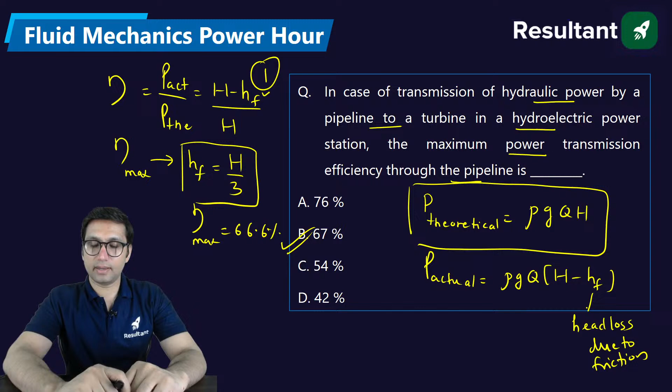Next question. A pipe having a length of 200 meter and 200 mm diameter with friction factor of 0.015 is to be replaced by a 400 mm diameter pipe of friction factor 0.012, to convey the same quantity of flow. The equivalent length of the new pipe for the same head loss will be?

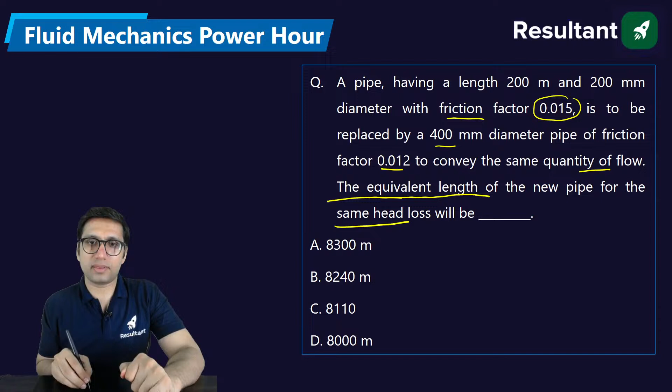In this question two things are given: the head loss is the same, and the discharge is also the same. So for two pipes, the head loss is equal to FLV square by 2GD.

If you have to write the head loss in terms of discharge, it will be FLQ square over 12D power 5 — this is the formula in terms of discharge. If you write it in terms of velocity, it will be FLV square by 2GD. But why am I using the discharge formula and not the velocity one? Because discharge is mentioned in this question, that's why I use this formula.

If I equate the head loss due to friction in both cases, this will be F1 L1 Q1 square over 12 D1 power 5 equal to F2 L2 Q2 square over 12 D2 power 5. Since it is mentioned that the discharge is same, Q will get cancelled out. Same quantity of flow is given. The 12 will also get cancelled out.

Rest all the values are given in this question. Just put those values and you will get the answer. It is 12.1, but you can take approximately 12.

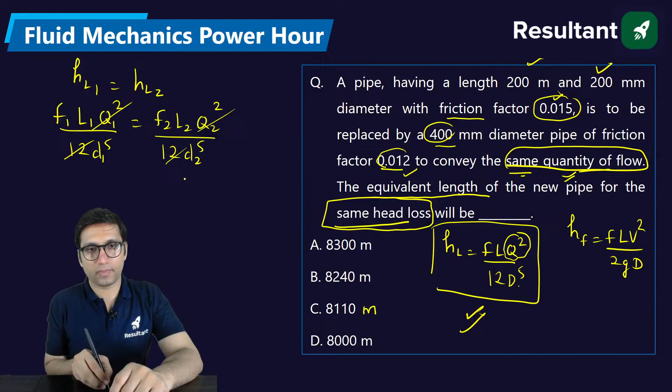For better result, L2 will be equal to F1 by F2 into L1 into D2 by D1 power 5. So this will be 0.015 over 0.012 into L1 equal to 200, into D2 by D1, where D1 is 200 and D2 is 400, by 200 power 5.

Please try to solve this question. So this will be 0.015 divided by 0.012 into 200 into 32. Yes, use calculators, try to solve this question correctly.

If you use a calculator, you will get the exact answer, and that will be 8,000 meter. Are you all getting this value? Please let me know. I don't want an approximate answer, you should get the exact answer. If you use the calculator, you will get the exact answer of 8,000 meter. I hope you all are getting this value.

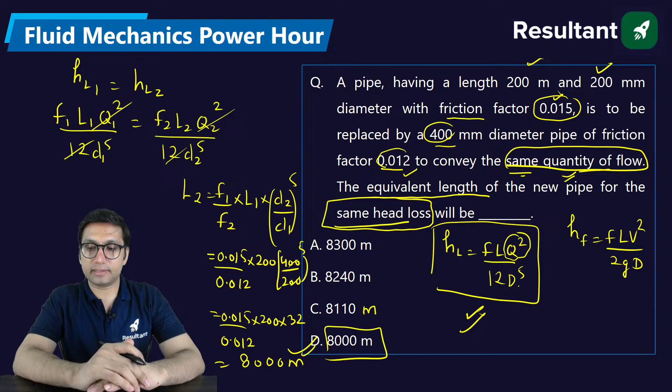Okay, understood the question. Next question. A curve that is everywhere tangent to the instantaneous local velocity vector is called as? There are different types of lines or curves mentioned: streak lines, path line, normal line, streamline.

Now we are talking about a curve that is everywhere tangent to the instantaneous local velocity vector. You must have read about streamlines. Streamlines are imaginary curves, and if you draw a tangent on these streamlines, this tangent gives you the direction of the velocity vector. So these imaginary lines, over which if you draw a tangent you get the direction of instantaneous local velocity vector, are called streamlines.

Okay, very good. Next question: for fully developed laminar pipe flow, the average velocity is? For fully developed flow, when we say pipe flow, we are talking about flow through a pipe, and also about the fully developed flow. So when we say fully developed flow, initially when the flow takes place inside a pipe, the velocity profile tends to vary like this.

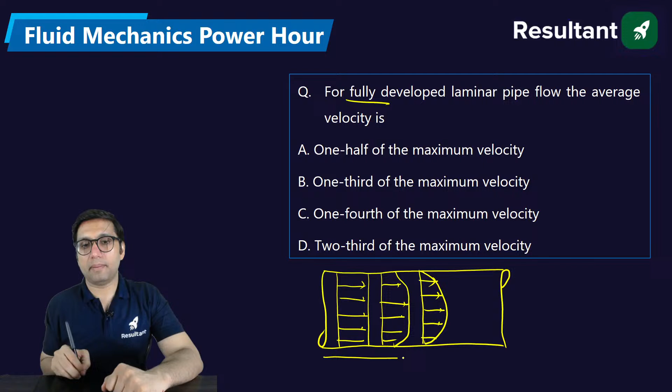But after some time, the variation becomes uniform. That means there is no variation of the velocity profile. The point after which the velocity variation stops is called the hydrodynamic length. After that, the flow is called fully developed flow, and the velocity profile will stop changing its nature. Velocity profile will become constant.

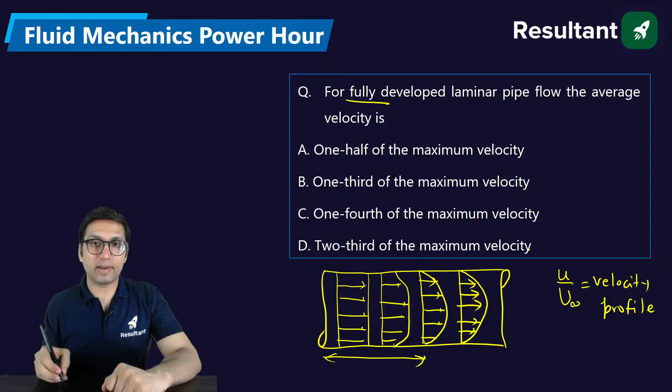What is velocity profile? That is u by u infinity. This is called the velocity profile. The velocity profile will not vary in the direction of the flow. Will not vary with direction of flow. That is called fully developed laminar flow.

Now, in case of laminar flow through the pipe, the average velocity is equal to half of maximum velocity. The average velocity becomes half of maximum velocity, but this is only true for pipe flow. So when we are talking about the pipe flow, then this is correct.

But if we talk about the flow through parallel plates, fixed parallel plates, here also the same condition happens. The maximum velocity is found at the center. At the center you will find the maximum velocity, but the average velocity will be equal to 2/3 of maximum velocity for the flow through fixed parallel plates.

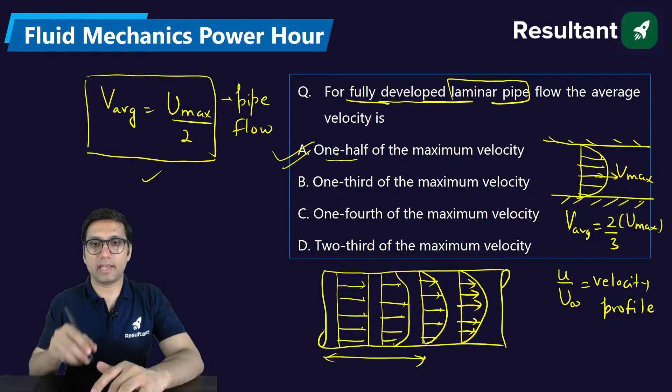Clear? In this case, the answer will be option A, 1/2 of the maximum velocity.

Consider the following statement about the losses in the pipe flow. Shock losses are the major losses in the pipe. Shock losses are major losses.

Viscosity is a property of the fluid which accounts for major losses in the pipe.

No, it is not 3 by 2. It is 2 by third if you are talking about the average velocity. Generally, we talk about the average velocity in terms of maximum velocity. So it is 2 by third of maximum velocity, average velocity.

The head loss at the entrance of the pipe is half that of its exit. There are three statements mentioned here. Which of the following statements are correct about the losses in the pipe flow?

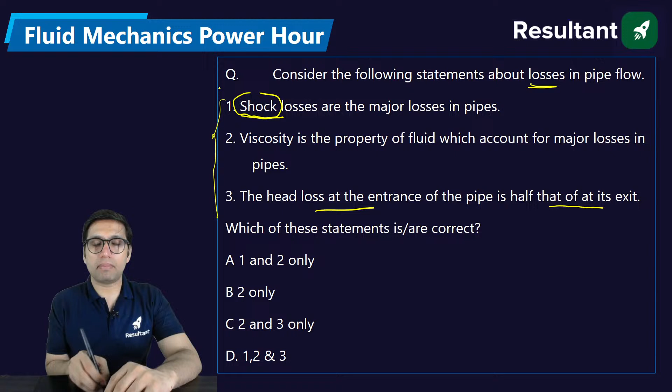So if you see the first statement, shock losses - what do you mean by shock losses? If you remember, when we discuss minor losses, there are different types. Sudden expansion loss takes place when the flow suddenly expands, passing from a small pipe to a large pipe. Similarly, sudden contraction. So when these phenomena happen - sudden expansion, sudden contraction, bend loss, entry loss, or exit loss - they all come under minor losses.

They are all shock losses. So they are minor losses, not major losses.

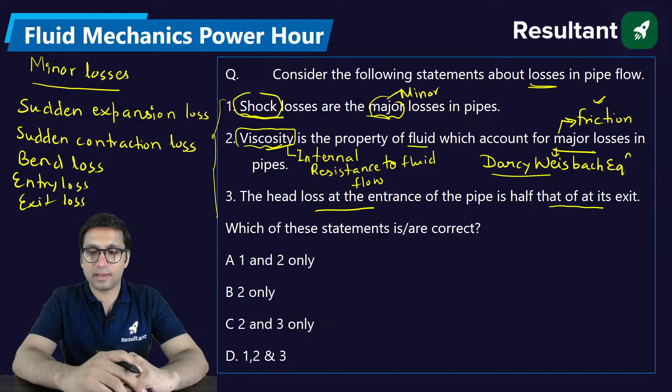The head loss at the entrance of the pipe is half that of exit. The exit loss you must have studied - the exit loss is equal to V square by 2G. Entrance loss is equal to what? The loss at the entrance of the pipe is equal to half of the exit loss. It is just half of the exit loss, which is 0.5 V square by 2G.

So the right answer for this question is option C, 2 and 3. Clear?

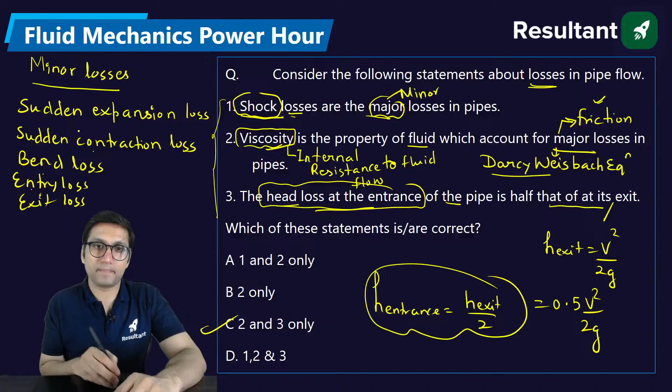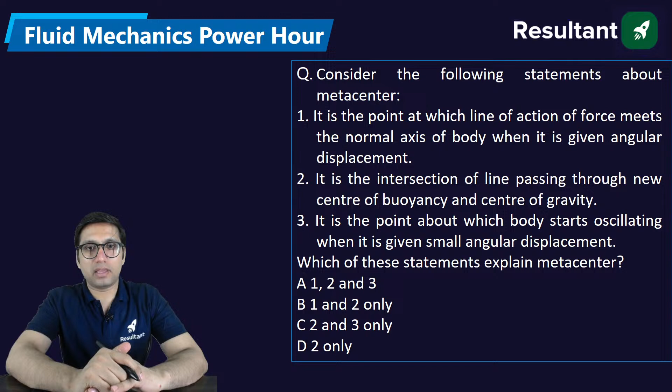Meta center you all have studied. It is a point, denoted by M, and this point is basically responsible for the stability of a floating body. When we have to study the stability of a floating or partially submerged body, this point meta center plays a very important role.

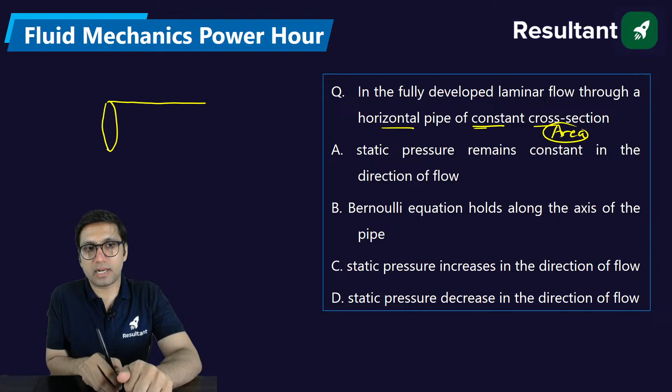Now a fully developed laminar flow is happening inside this pipe. Then what can we say about the static pressure? Static pressure remains constant in the direction of flow. Let us say this is the direction of the flow.

Now tell me which question this is. And we are talking about fully developed flow through a horizontal pipe. First statement: static pressure remains constant.

Does pressure remain constant? You have studied in this case that pressure will decrease in the direction of flow. You must have studied about that. This is called negative pressure gradient.

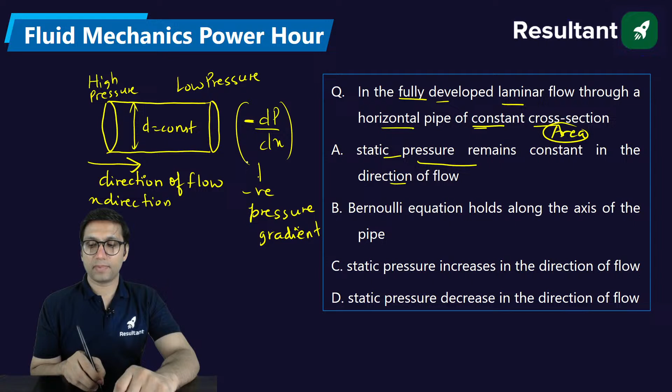Are you getting my point? So this answer is incorrect. Static pressure will decrease in the direction of the flow. Clear?

Bernoulli equation holds along the axis of the pipe. If you have any idea about this fully developed flow, you know that in the fully developed flow, this boundary layer develops from the wall of the pipe, like this and like this.

And if you see somewhere on the center of the pipe, is there any possibility that you will not find the boundary layer? There will be a boundary layer. On the boundary layer and inside the boundary layer, Bernoulli equation is not eligible. So the axis of the pipe is actually the boundary layer. This axis of the pipe is nothing but a boundary layer. So the boundary layer will be formed somewhere on the axis of the pipe. So definitely you will not find the Bernoulli equation holding here.

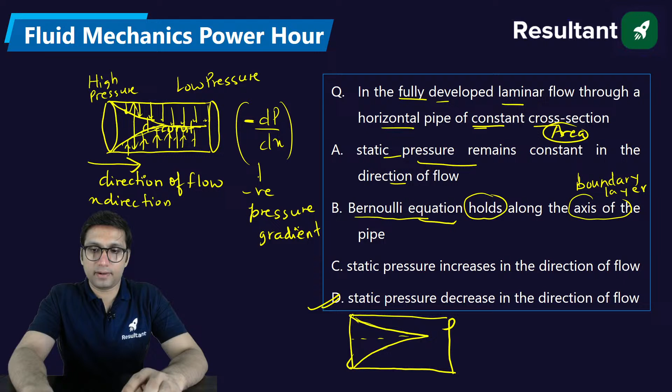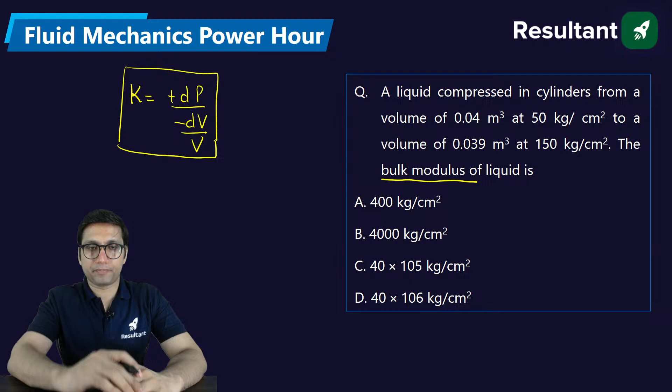Now increase in pressure, you can see the pressure is increasing from 50 to 150, so this is the increase in pressure. The volume is decreasing, so this is change in volume. Final volume is 0.039 minus 0.04 over original volume 0.04. Just solve this and you will get the answer. Tell me what is the answer. This is in power, not multiplied here.

Try to solve this everyone and tell me the answer.

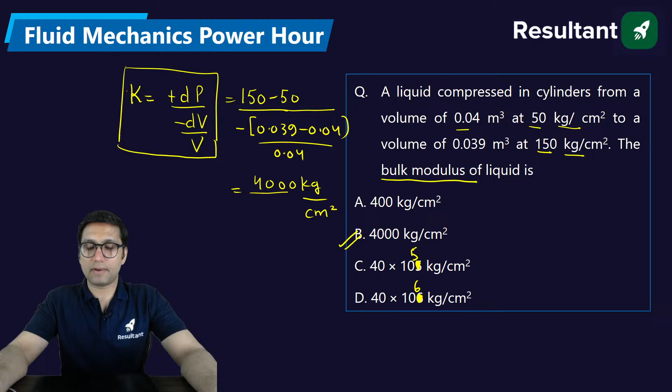Okay, if you solve this, you will get 4000 kg per centimeter square. You don't have to check the units because bulk modulus will have the same unit as pressure, since pressure has a unit of kg per centimeter square. So bulk modulus will be having unit of kg per centimeter square. So you don't have to change the units here. Units are not changed, you just have to do the calculation. If you know the formula, you will get the answer.

The only correct statement related to hydraulic turbines among the following is... There are some statements given about hydraulic turbines, and you have to tell which of the following statements are correct. Pelton wheel and Francis turbine are impulse turbines.

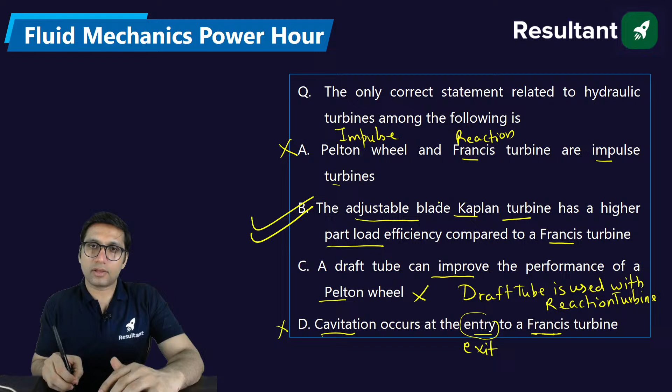Do you understand the meaning of adjustable blade? Kaplan turbine has got 4 to 6 adjustable blades. And because of having adjustable blades, Kaplan turbine not only has full load efficiency, it can also offer better part load efficiency as compared to Francis turbine. So that is an advantage.

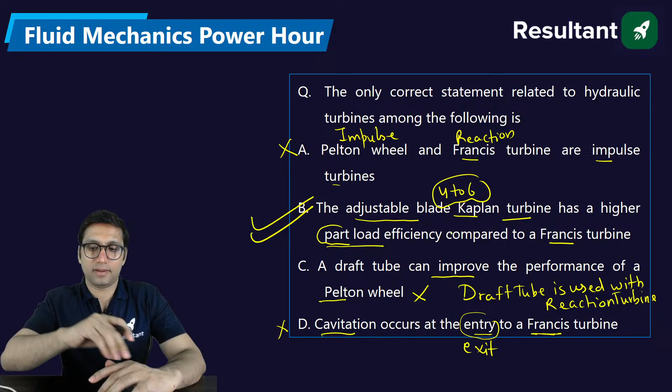The main function of the draft tube in a hydraulic reaction turbine is to... Reaction turbine definitely uses a draft tube. We know that it is used at the exit of the reaction turbine. At the exit of the reaction turbine, you will find the draft tube.

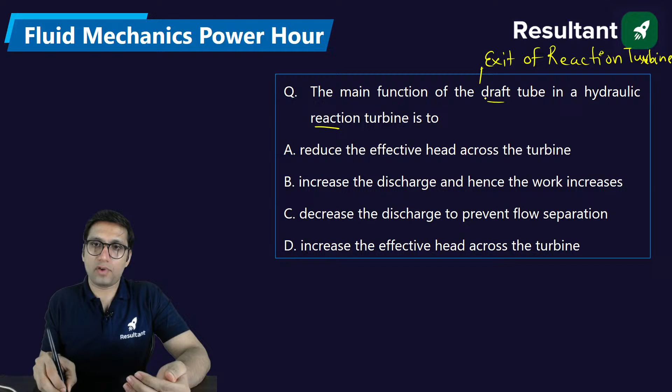But why do we use the draft tube at the exit of a reaction turbine? It is used to reduce the effective head across the turbine, increase the discharge and hence the work increases, decrease the discharge to prevent flow separation, or increase the effective head. So if you have studied the function of the draft tube, the function includes increasing the effective head.

Why do we use draft tube? Draft tube function.

The main function is to increase effective head. What do you mean by effective head? Any idea? Do you have any idea about the effective head? Have you studied this? Look, one is gross head. One is net effective head. Okay.

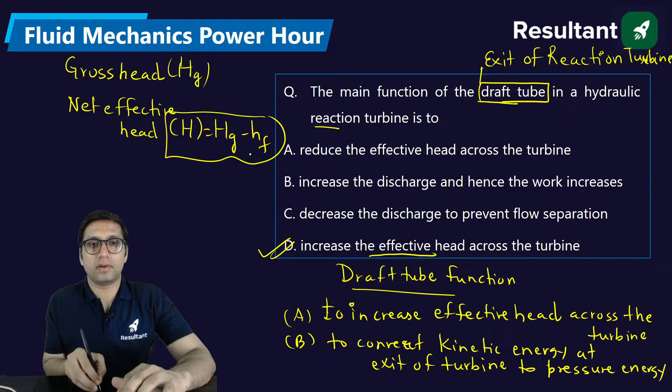So to increase the net effective head across turbine, we use a draft tube. And second is to convert kinetic energy at exit of turbine. Reaction turbine has got lot of kinetic energy at exit which we convert to pressure energy. So this is the main purpose of using a draft tube, to increase the net effective head and to convert kinetic energy. Net effective head is basically gross head minus head loss due to friction. So that is net effective head.

One short session on boundary layer, theory of boundary layer. Sure, next I will definitely try to take some sessions, theory sessions on fluid mechanics and some important topics related to thermodynamics or fluid mechanics. Okay, next month I will take this kind of session.

What is the function of surge tank? Like we say draft tube is something related to a reaction turbine, likewise surge tank we basically use for Pelton turbine. Wherever we have a turbine, because Pelton turbine is mostly called a high head turbine. High head means what is the meaning of head of the turbine? The point from where the water starts flowing through a pipe called penstock, to the point where the water is actually delivered, this is called as H, this is called as net effective head. Now if this head of the turbine is greater than 250 meters, it is called high head turbine.

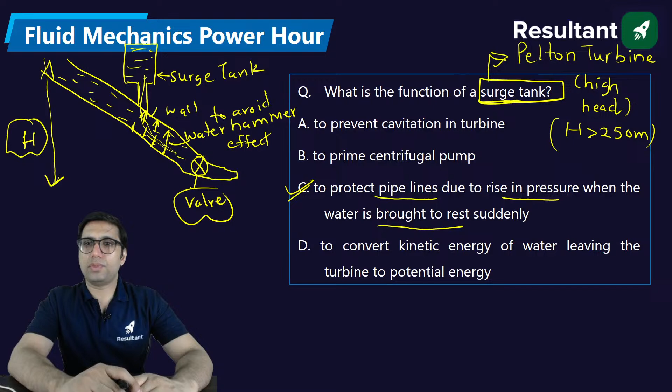So the main function of surge tank is, in this kind of situation where the valve is suddenly closed because of some unprecedented reason, if we suddenly close the valve then the water hammer effect should not happen. You must have studied water hammer, to avoid water hammer effect, if the valve is suddenly closed then this water will go into this tank, this is called surge tank. Whenever we require more water then from this surge tank this water can also be provided. So this is the main purpose of providing a surge tank, to protect the pipelines due to rise in pressure when the water is brought to rest suddenly. This is basically called the main function of surge tank, but we use it for Pelton turbine, which is a high head turbine.

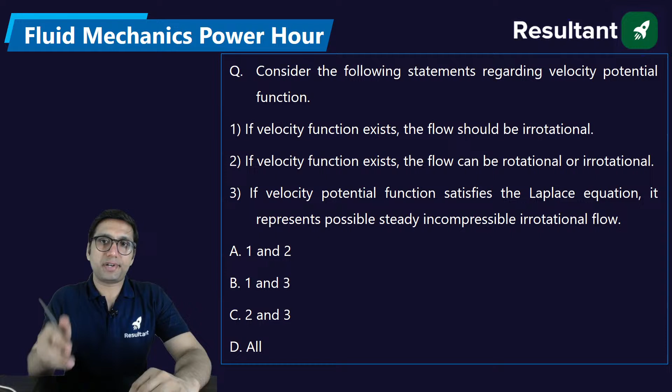Consider the following statement regarding velocity potential function. Velocity potential function, denoted by this, is also called a scalar function of x, y, z, which is a three-dimensional scalar function. If you derivate this scalar function in a given direction, let's say in x direction, you will get the velocity in that direction. Negative derivative of this velocity potential function in a given direction will give you the velocity in that direction.

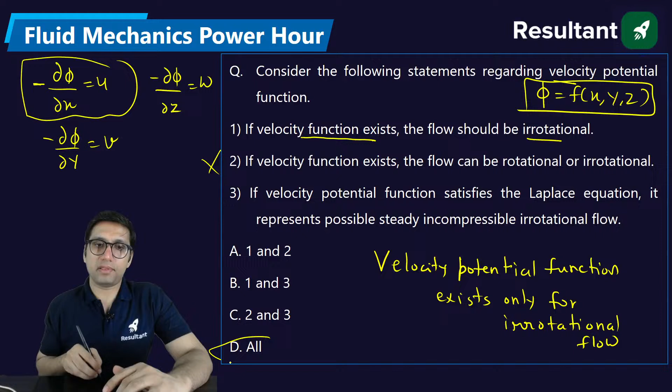This is the important point about the velocity potential function. Now there are three statements given here. First statement: if velocity function exists, the flow should be irrotational, right? I don't know how many of you have studied this or not. Velocity potential function exists only for irrotational flow. That means if the flow is irrotational, option 2 is not correct, option D is not correct, option C is not correct, option A is not correct. So the only option we are left with is option B.

I always love this kind of questions where we have many statements and we have to give the answers, because in these statement type questions with multiple statements, if you know what is right or what is wrong, you can easily get the right answer.

Like this, you know, second option is incorrect, then your answer comes out very easily.

Third statement is: if velocity potential function satisfies the Laplace equation. What is the Laplace equation? This. If velocity potential function gives this kind of result, this is the Laplace equation. If velocity potential function satisfies the Laplace equation, then it will represent the possible steady incompressible irrotational flow.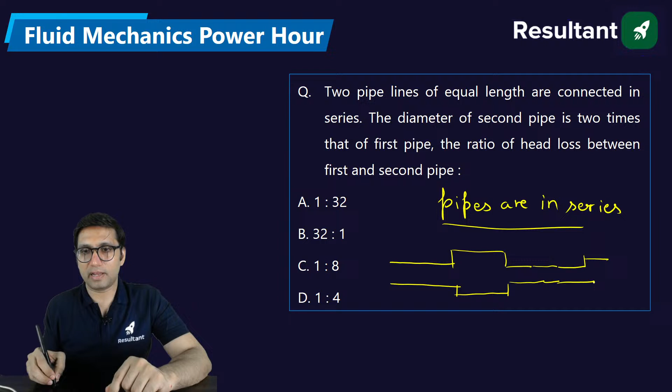Please focus on the question, everyone. When the pipes are connected in series connection, first you need to understand why we connect pipes in series. When we connect multiple pipes in series, whether their diameter is different or same, it doesn't matter. There can be same diameter pipes or different diameter pipes. Let's say they are different diameter pipes so we can easily distinguish. This is first, this is second, this is third, this is fourth.

Discharge in the pipe remains same, but the head loss will get added up. The head loss will increase when the pipes are connected in series connection. Okay, this is the concept.

But in this question it is given, let's say two pipes are connected. Forget about three, we are just talking about two pipes connected in series. So if two pipes are connected in series, what will happen? The diameter of the second pipe is 2 times of the first pipe, that is D2 is equal to 2 times of D1.

But we have to find the ratio of the head loss. Head loss in the first pipe will be equal to F1 L1 Q1 square by 12 D1 power 5. And the second pipe's head loss will be similarly given.

Now you must be thinking, sir, how to solve this question, because we have no idea about discharge, length, friction factor, nothing is given. So if it's not given, you don't have to use it, because we have to find the relation between the head loss with respect to diameter. The diameter is given, right? So what is the relation between head loss and diameter? It is inversely proportional to diameter power 5.

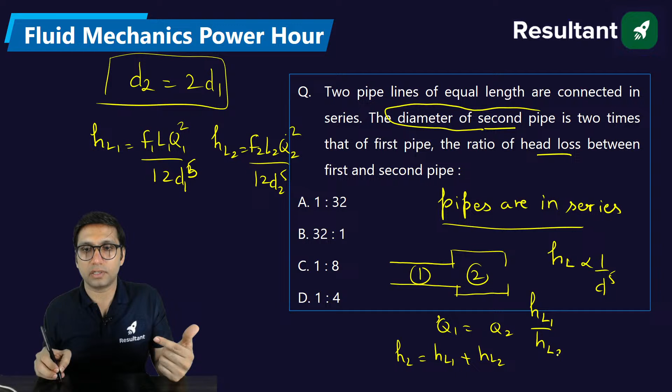Just use this relation. Ratio of the head loss between the first pipe and second pipe will be equal to D2 by D1 power 5. D2 is equal to 2 times of D1, so this will be 2 power 5. 2 power 5 is 32. So the ratio is 32 is to 1. Clear?

Those who are giving option A as the answer, like Subhadeep, you are finding the ratio of head loss of second by first. But in this question, you have to find the ratio of head loss of first by second. So when we say first by second, that means it will be the ratio of second diameter to first diameter, power 5. Second diameter is twice of first diameter, so D1, D1 cancels out, and this becomes 2 power 5, which is 32.

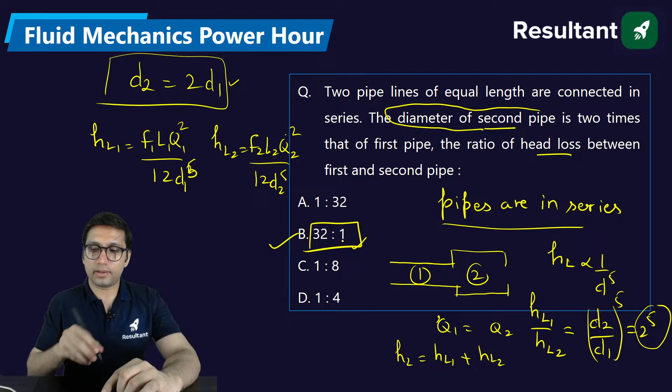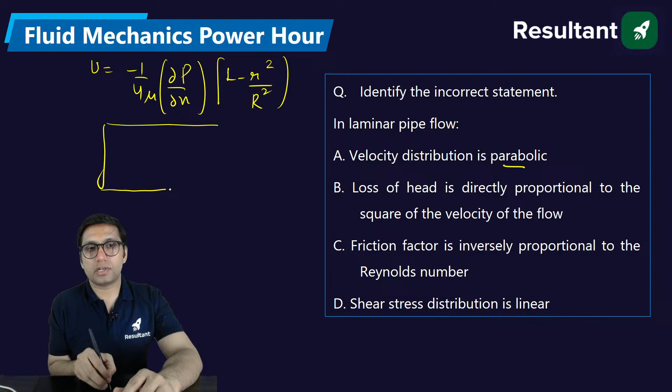Identify the incorrect statement. In laminar pipe flow, velocity distribution is parabolic. Yes, the velocity distribution is minus 1 by 4 mu del P by del X, times 1 minus r square by R square. This is a parabolic velocity distribution. If you see the velocity profile also, the velocity profile in laminar pipe flow is like this - it is parabolic, correct.

But here you have to find the incorrect statement. Loss of head is directly proportional to square of the velocity of the flow. When we say laminar pipe flow - I have told you the formula of head loss as FL V square by 2GD, and it is also equal to FL Q square by 12 D power 5. But when we say laminar pipe flow, only for this case, you can write head loss as 32 mu VL by rho G D square, and you have to use this formula for head loss if we are talking about laminar flow.

So for laminar flow, friction factor is equal to 64 by Reynolds number - this is correct. Shear stress distribution is linear - this is correct. But the statement that head loss is directly proportional to square of velocity is not correct, it is incorrect. Why? Because for laminar pipe flow, the head loss is directly proportional to velocity, not square of velocity. Clear to everyone? Are you getting this, everyone?

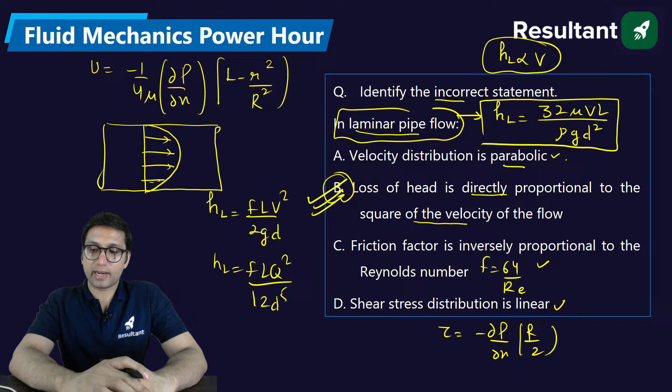Next question. In a laminar pipe flow, water flows through a pipe of diameter 100 mm with center line velocity 20 meters per second. Then the velocity of the fluid at a distance of 20 mm from the pipe surface is...

How are you going to solve this question? So we have a laminar pipe flow case.

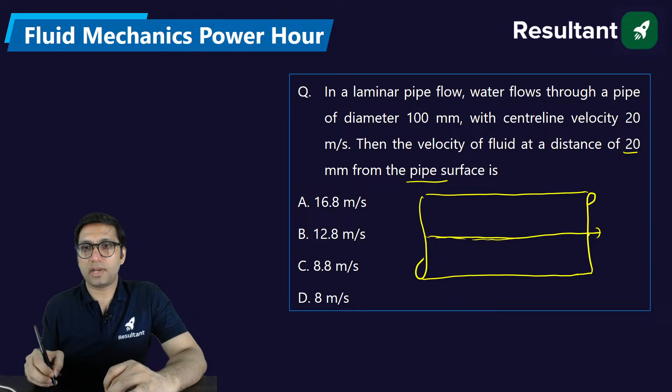Okay, just a second. So we know that center line velocity means velocity at the center. Velocity at the center of the pipe is 20 meter per second. At the center means center line velocity is at the radius. So this radius is equal to how much? 50 mm. So at 50 mm radius, the velocity is this 20 meter per second.

Now you have to find the velocity of the fluid at a distance of 20 mm from the pipe surface. That means somewhere here. At this particular point, you have to find what is the velocity at this particular point. So how will you find this?

You know the relation. I have told you this relation, u is equal to u maximum times 1 minus r square by R square. Do you know this relation? The maximum velocity is what? This is the center line velocity, also called the maximum velocity. This maximum velocity is 20.

This velocity, this radius - there are two radii. One radius is r, small r. This is capital R. So this is 20 by 50 square. Just try to solve this. You will get the answer. Please, everyone.

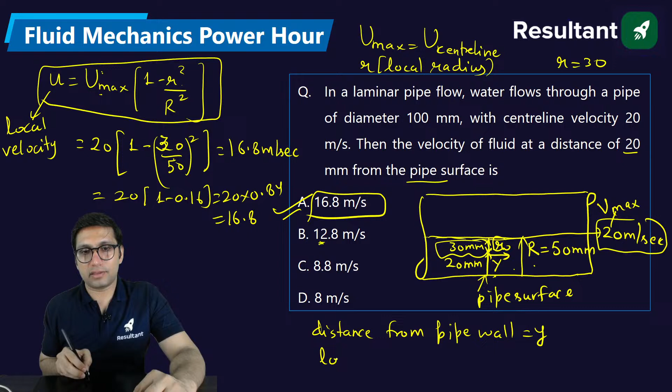This will be 30, yes, because the radius calculation will be done from the center. So this r, this is r - my mistake, this will be 30, r will be 30. So distance from the pipe wall is equal to y, and local radius is equal to radius minus distance from the pipe wall. This will be 50 minus 20, 30 mm. Yeah, sorry, my mistake, this will be 30, not 20.

Yeah, please solve it. Local radius will be... just a second.

This is 20 and this will be 30. So you have to find velocity at this distance. This is r, small r will be this, this is y. Clear? If you solve this, you will get the answer. Then I think you are getting 12.8 meter per second.

How will 30 come? Because actually the distance from the pipe surface is given, but the distance from the pipe surface is not the local radius. The distance from the pipe wall is denoted by this y, pipe surface. Local radius calculation is always done from the center, right? We calculate radius from the center.

But actually the distance given is 20. If this is 20 and this is 50, then local radius will be this distance, r. You have to find velocity at this distance, so this will be 30 mm. This r calculation will be done from the center of the pipe. That is how you will get r. Clear? So this will be 30, not 20. Thank you everyone for pointing out my mistake.

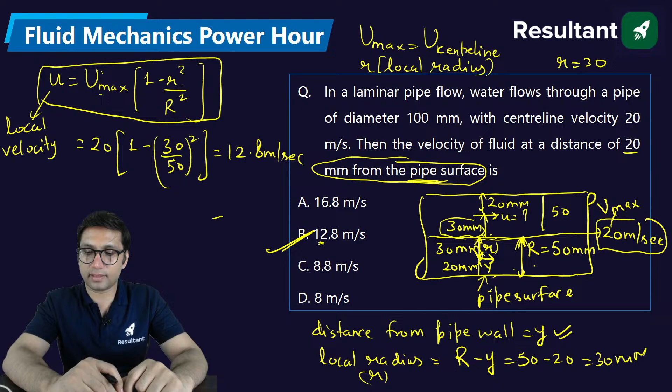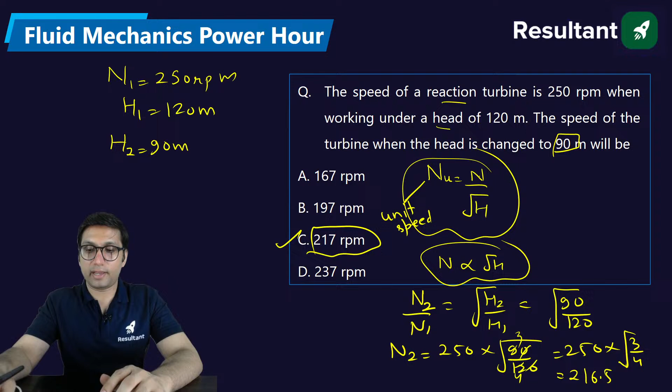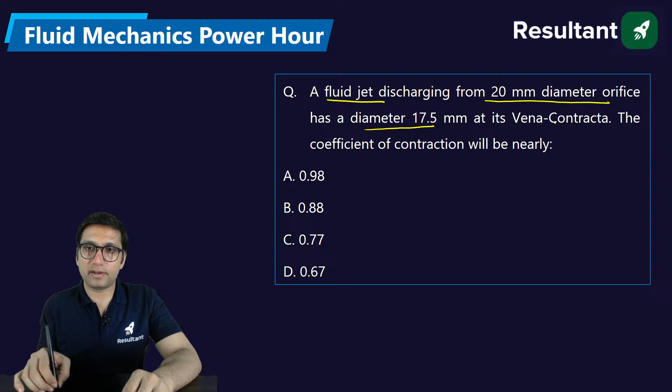A fluid jet discharging from a 20 mm diameter orifice has a diameter of 17.5 mm at its vena contracta. The coefficient of contraction will be... you must have studied the concept of vena contracta. Let's say we have a pipe, and in this pipe we have installed an orifice meter you have studied. So when we studied the orifice meter, there is some point, this is the point of orifice.

After the flow has passed through the orifice, there will come a point that is called the vena contracta. Vena contracta is a point where the area becomes minimum. This is also called the theoretical minimum area. And the actual minimum area will be this at the orifice. According to us, this will be the actual minimum area. What is the coefficient of contraction?

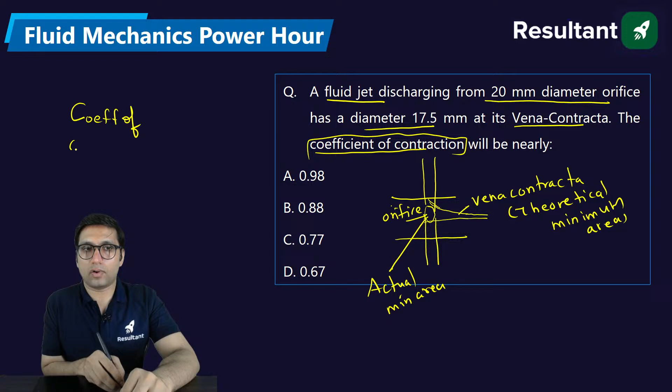Coefficient of contraction is equal to the ratio of area at the vena contracta to the area at the orifice. Just put the values and you will get the answer. Area, obviously it will be circular, so this will be pi by 4 d square. So we can directly write diameter. This will be 17.5 divided by 20, squared. Okay, you will get the answer. Tell me what answer you are getting.

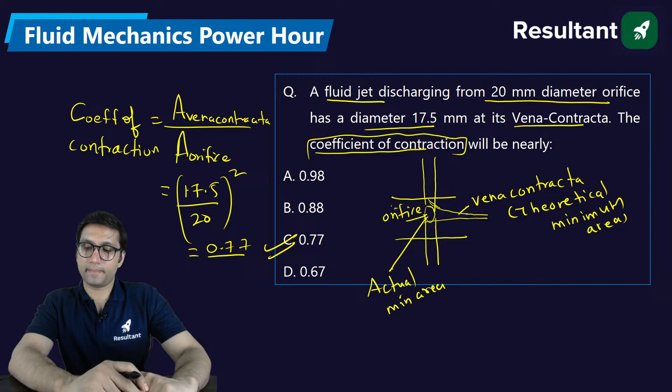This is the last question for today's session. Someone says 0.875. This will be 0.77. 0.77 will be the right answer. Are you all getting this value? You have to do the square also: 17.5 by 20, squared. When you do the square, you will get 0.77. Don't forget to square it. That's all, the rest of the questions will be taken in some other sessions.